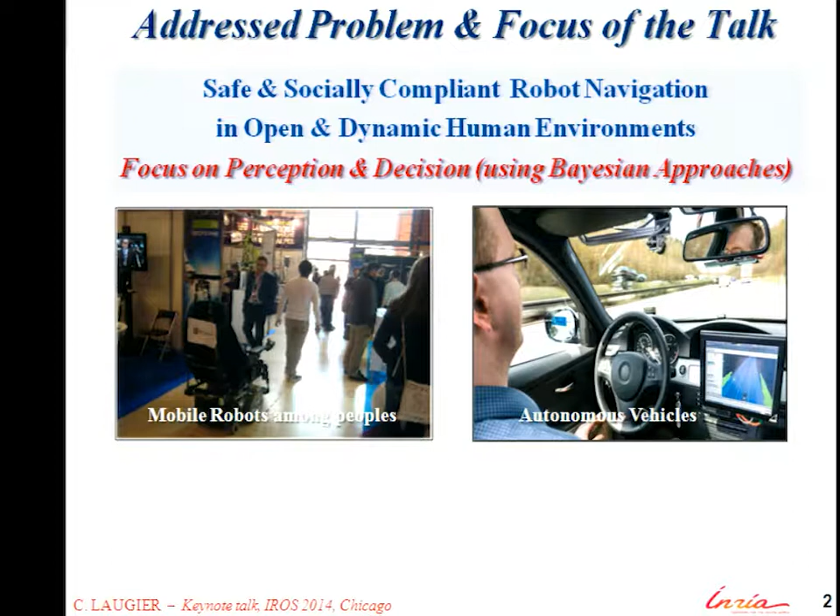The main features of this problem are, first, that the world is dynamic and open, so we have to take care of this when designing the models. The second point is linked to this: incompleteness, and managing uncertainty at both the model and perception levels. Finally, the human is in the loop, so we have to address social and interaction constraints when making decisions.

For the first point, perception: we need robust perception for dynamic human environments, processing different levels of perception. The first is the basic level for sensor fusion, SLAM, DATMO. The second takes into account contextual information and semantics for interpretation. The last level is close to the application.

For vehicles, the idea is to detect what is a safe navigable space at a given time. The main difficulty, again, is processing noisy data, incompleteness, dynamicity, discrete measurements from the system, and of course doing this in real time. All the models and algorithms have to take this important constraint into account.

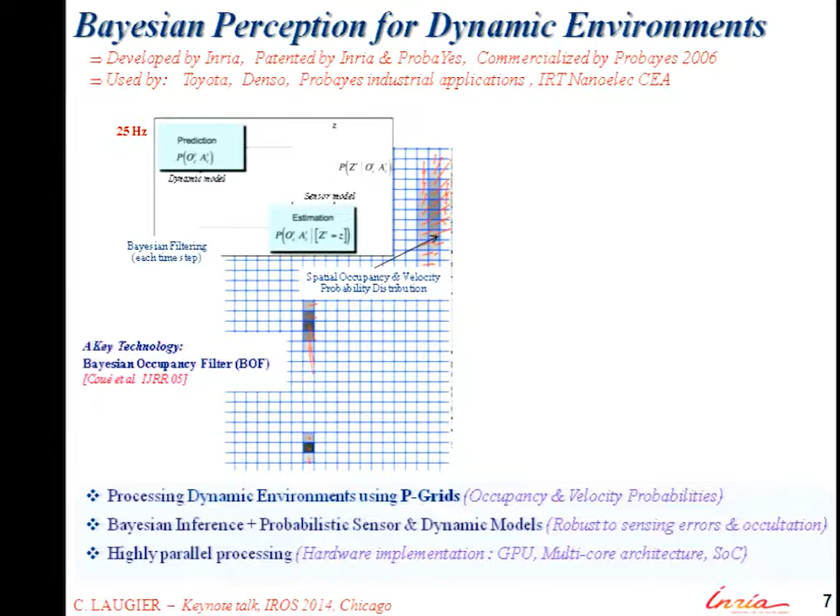One important property of this approach is the conservative prediction capability inside the inference system. This means it's possible to execute collision avoidance or collision anticipation using only this information.

For instance, here's an example of a pedestrian who is probably going to cross the street. This is an autonomous vehicle, and this is the vehicle which is parked. At one point the system detects and tracks the pedestrian. Then it will no longer see the pedestrian, but you'll see it stops, because it predicts that the pedestrian will probably continue to move. This is completely embedded in the process.

But we still have problems with the accuracy of velocity computation and the required memory size. So we recently improved this by making a hybrid system, separating what is static from what is dynamic. The static part is represented traditionally using an occupancy grid, and the dynamic part is represented using a set of particles, a kind of vector field of velocities. It's really more accurate.

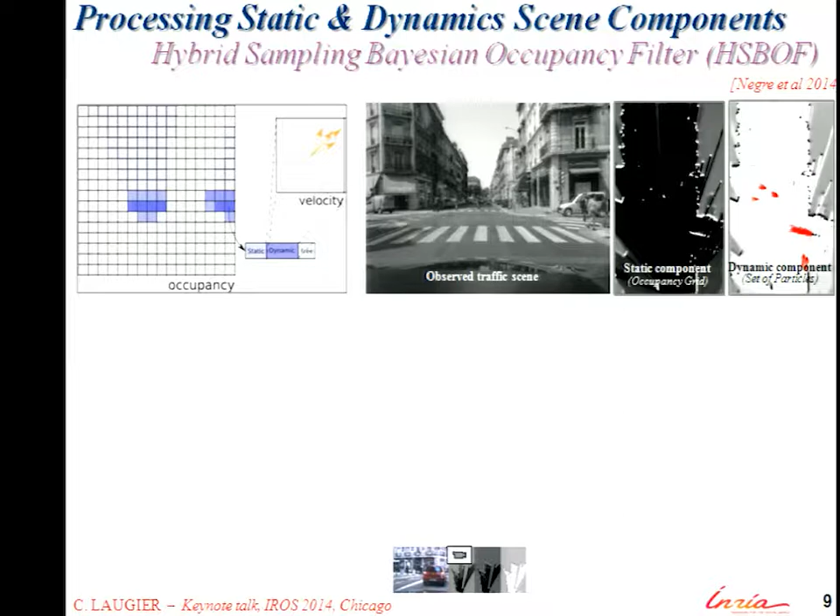Moreover, we can use information from the sensors inside the car to update the model. So in this case we have two parts: the static component, represented using an occupancy grid, and the dynamic component, represented by sets of particles, which allows smooth integration of the vehicle's motion for more realistic results.

Then all the information is propagated into the grid, and the set of particles move through the grid according to the dynamic model included in these particles.

So this is an example. I'll stop here. No, it doesn't work.

Okay, so this is an example in downtown Grenoble. Our car is here, and this is another car. There are a lot of pedestrians in the downtown area, and we are moving through the city. What you can see here is the result of scanning using the laser, the construction of the occupancy grid, and the real-time tracking and detection of what is moving and at what velocity.

So this, for instance, is a car. Each pedestrian is easily recognized and detected using the approach. I'll come back to this later for the detection of risk.

This has been implemented on this car, a Lexus, in cooperation with Toyota. At the moment we have two laser scanners and a stereo camera, and also another camera here.

This is the implementation inside the car, and what we are currently doing is miniaturizing the system by implementing it on a new NVIDIA GPU, but also an implementation on a many-core STHORM architecture, in order to reduce the size and energy consumption of the system and improve its efficiency.

So basically, this is the thing we are obtaining using directly the information processed by the system. I mean recorded trajectory using OpenStreetMap, GPS, IMU, and so on. This is a result of sensor fusion, and this is a result of the analysis of the situation, which gives at each time step what is the navigable space just in front of the vehicle.

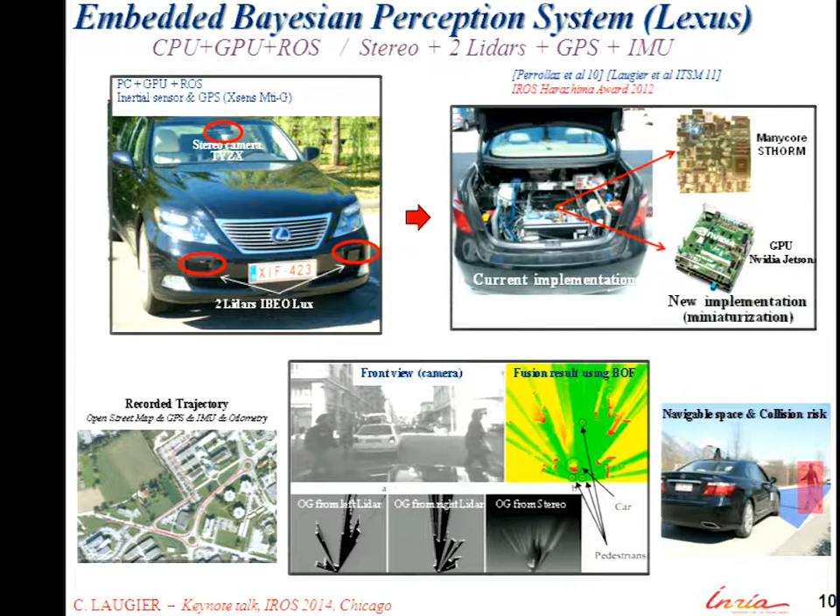So this architecture is then combined with a model in order to construct objects, to detect objects, and to track objects, and to understand what objects are doing. Objects can be bicycles, pedestrians, cars, and so on.

And this is the result of the Bayesian sensor fusion, including stereo vision and laser scanners. The result isn't really visible for anybody here, but basically the result is the fusion of this information into this model, combining occupancy probability and velocity probabilities.

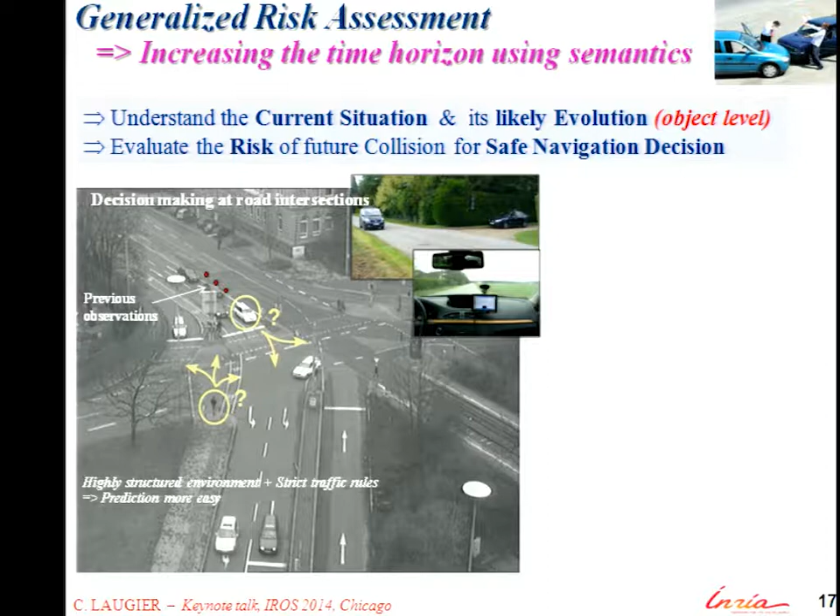So this can be used for evaluating the risk of collision and for making safe navigation decisions. I will skip the details since time is over. Just a video showing how the system is working on the road.

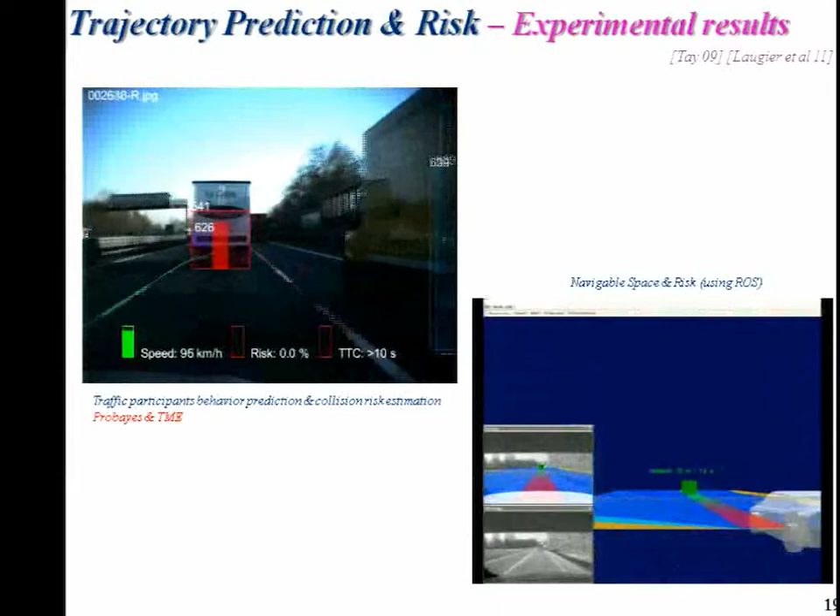This is the speed of the vehicle, about 100 kilometers per hour, the risk, and the time to collision. On the different tracks, we can see the prediction of whether the truck is going to move straight, turn left, or change to the right lane. And this is the representation of the risk for the driver of the vehicle.

A last video shows how the system works when there are several participants at an intersection, where we need a different way to reason. In this case, we use a human-like reasoning process, comparing the driver's intention and the driver's expectation. Comparing both, we can detect a possible risk. This is a video showing how the system is working, and it's valid.

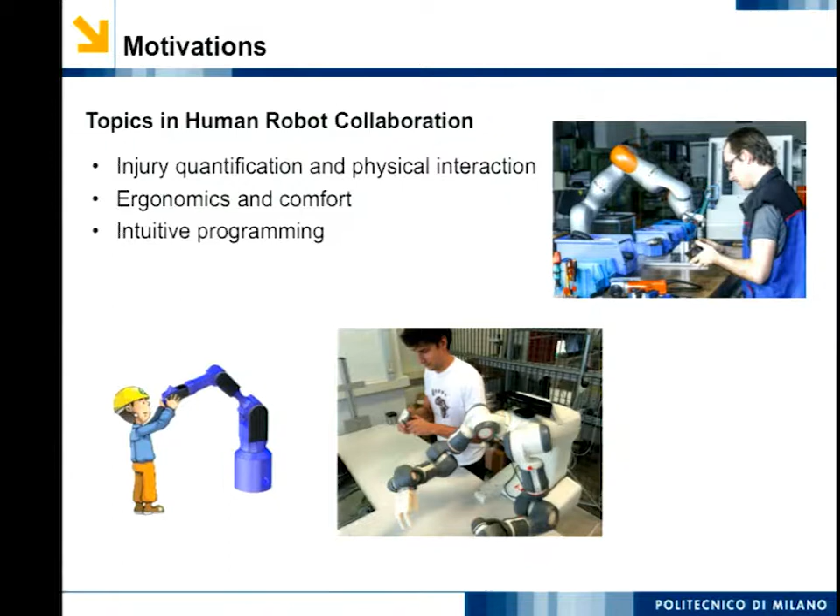My name is Andrea Zanchettin. I'm going to present this work, titled Real-Time Collision Avoidance in Human-Robot Interaction based on Kinetostatic Safety Field, developed in my lab in collaboration with Matteo Parigi, a former master student, and Professor Paolo Rocco. We have been working on human-robot collaboration in our lab for quite a few years, addressing different topics: injury quantification for physical interaction, ergonomics and comfort during human-robot interaction, intuitive programming, and of course collision avoidance, which is the main topic of my presentation.

There are many alternatives to cope with collision avoidance. One is randomized planning, based for example on RRTs. Another is artificial potential fields, and probably many others. But sometimes they are difficult to adopt in real time, or they are poorly capable of capturing the geometry of both the obstacle and the robot.

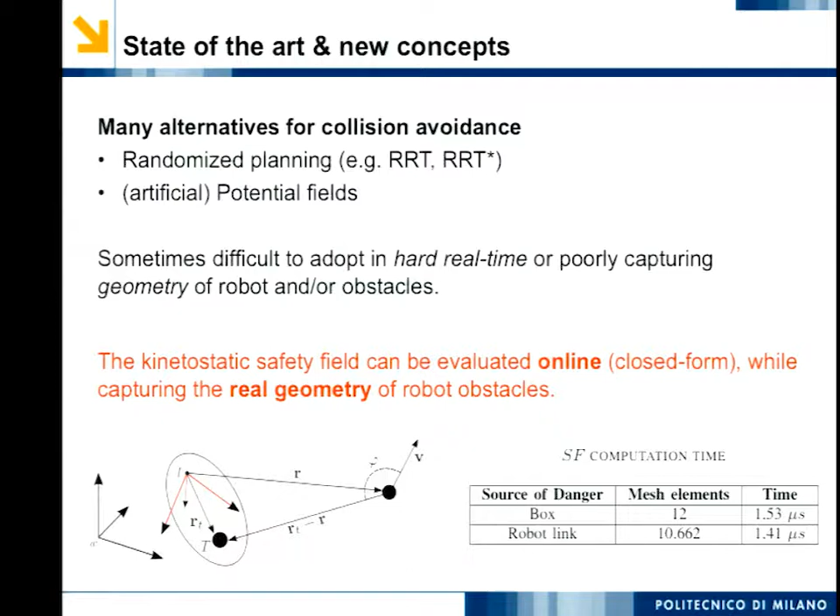So we developed the so-called kinetostatic safety field, which is very convenient to use in real time, with a closed form solution so we can compute it quite fast - something like 1 microsecond - and it is very capable of capturing the whole geometry of the robot and of the obstacles. We use this with a control strategy, where the field helps avoid obstacles based on null space projection. Eventually, when the risk of collision is too high, we can relax the task in order to fully exploit all available degrees of freedom.

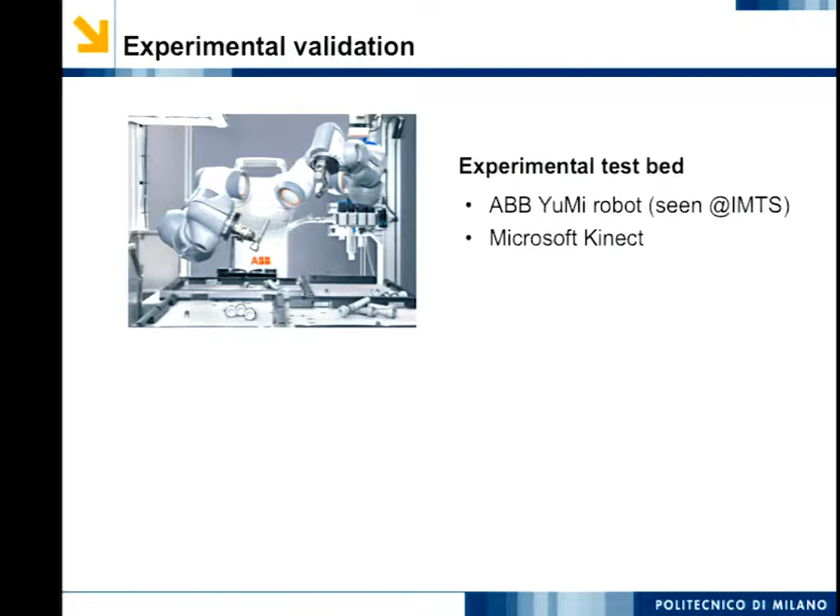So we did some experimental validation based on a dual-arm ABB YuMi robot, which you probably have seen at the IMTS fair. We used the Microsoft Kinect and the Reflexxes motion library for trajectory generation.

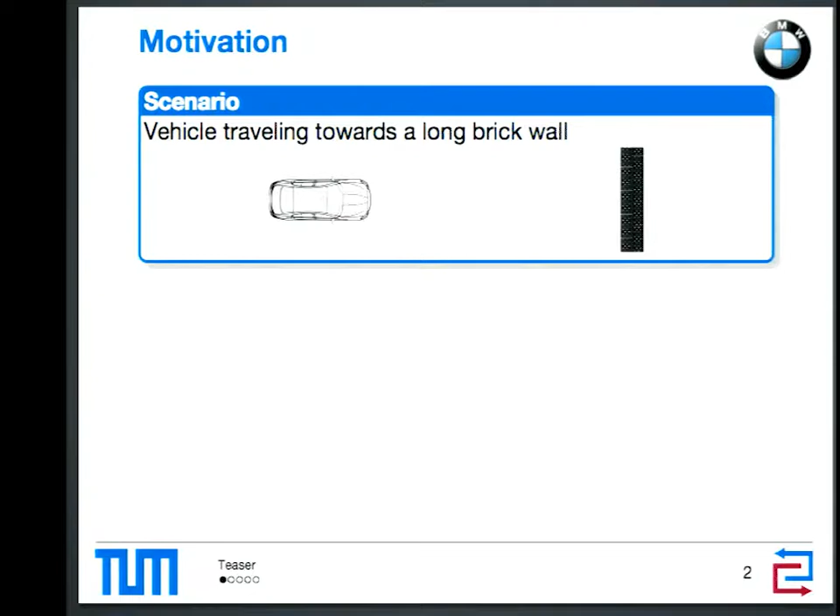Think about an autonomous platform which is driving towards a wall. The most intuitive approach to guarantee safety here is to use your trajectory generator and check all your trajectories for a collision, then execute one which seems to be collision free. However, this might lead to situations where at a later time step, all your actions will end up in a collision.

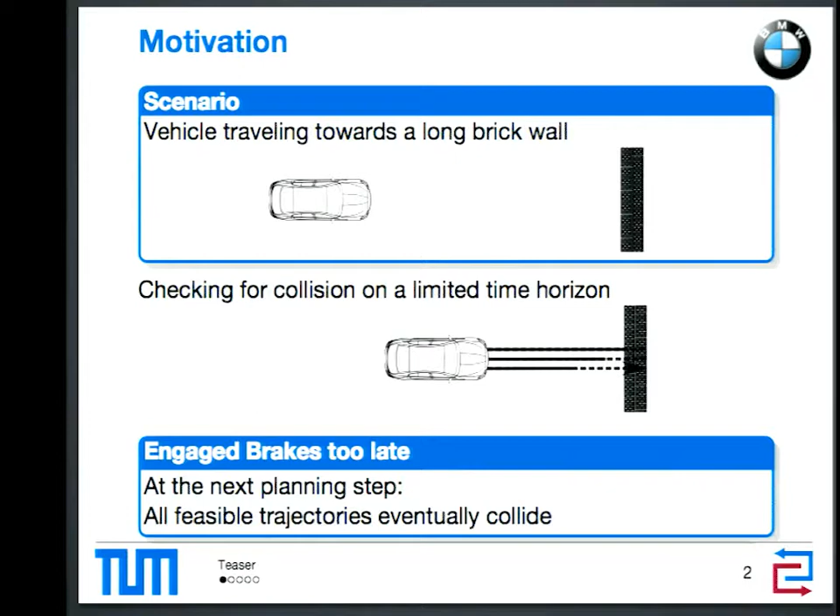These are called inevitable collision states. So you engaged your brakes just too late. Of course, we need to determine and avoid such states beforehand, which is pretty straightforward for one-dimensional systems with static obstacles, but becomes really challenging for higher dimensional systems and dynamic obstacles.

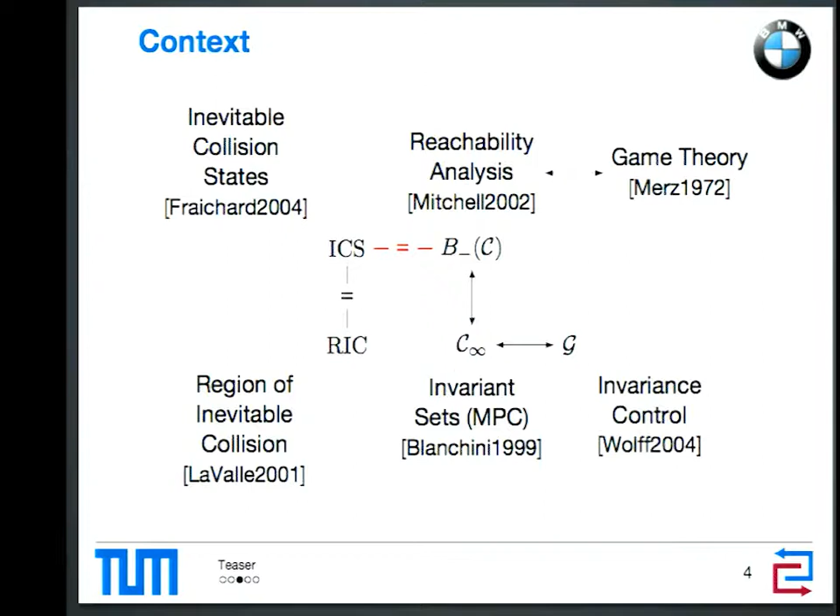There are different approaches to solve this problem, and what we're doing in this work is fusing the approach of inevitable collision states on one hand and reachability analysis on the other hand. With this, we are able to determine all the states which will inevitably lead to a collision, and we can avoid them later on.

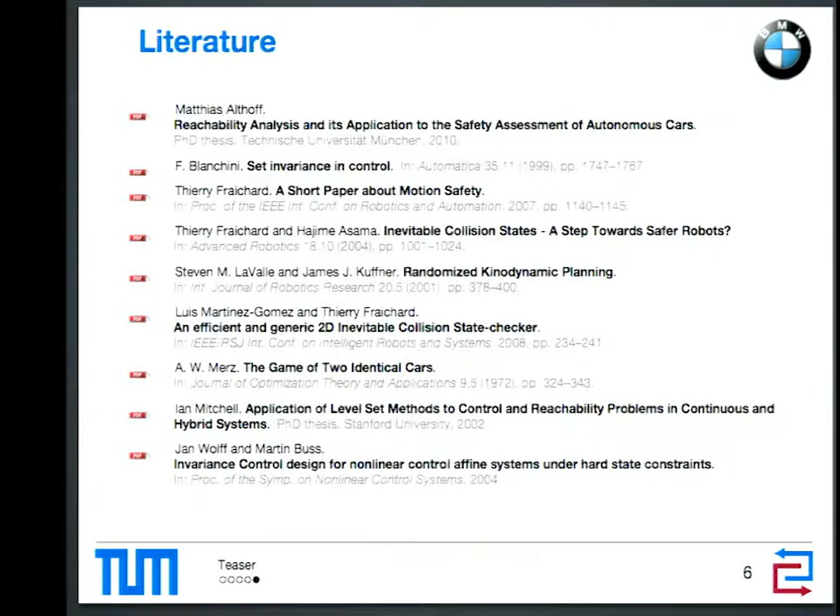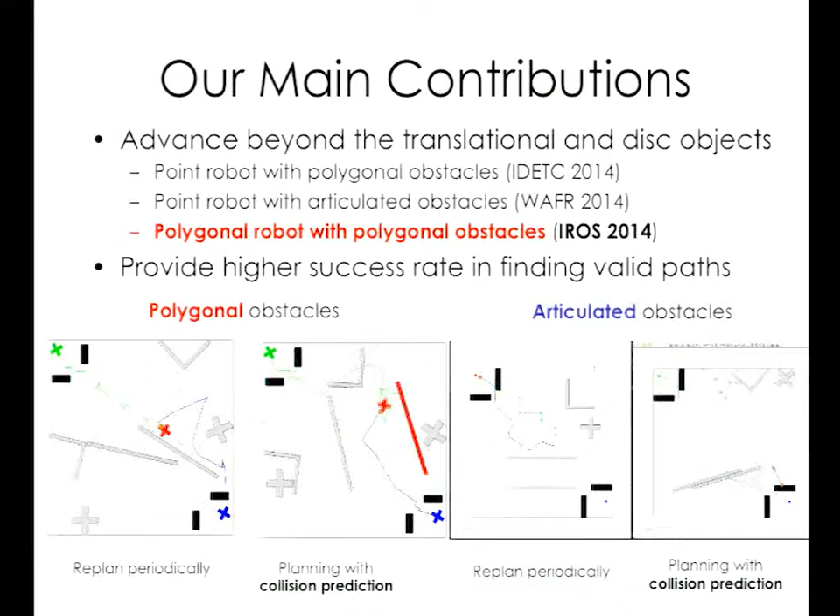The key idea is to compute the earliest collision time for a robot moving on a path. Contrary to traditional motion planning, we not only plan a path for the robot to execute, but also plan motions for the obstacles. We model obstacles as adversarial agents trying to minimize the time for the robot to remain safe on the path. So given time t, we know where the robot is, and the motion of an obstacle is calculated to minimize the time to hit the robot, which can be modeled as a function of t.

So the key theorem behind it is that the curve t equals t and f of t can partition the space into several regions, and we are interested in the potential collision region. The leftmost point of that region will be the earliest collision time.

For the polygonal case, we can decompose f of t into translational and rotational components, and by solving an optimization problem, we can get the earliest collision time.

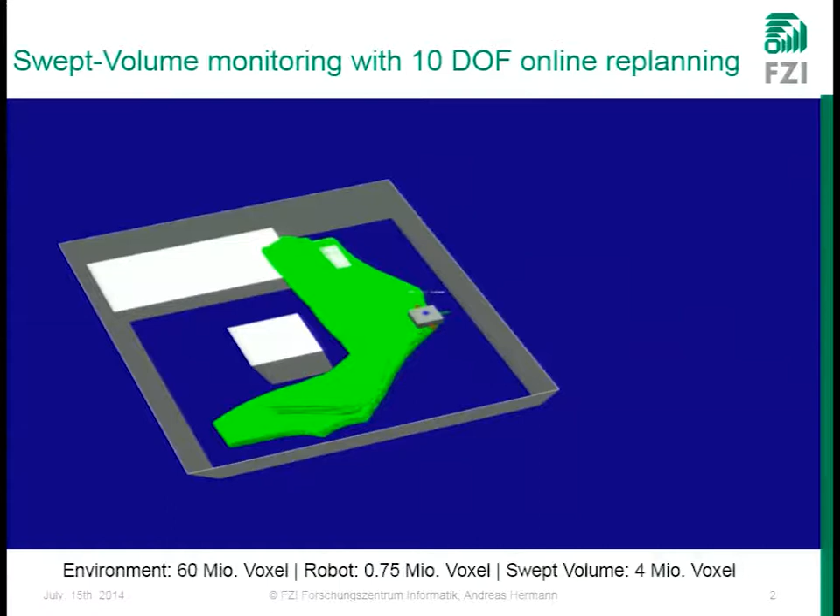In this video, you see a typical situation for a mobile service robot. You have a dynamic environment, and the robot has to go from the left corner to the right corner. What you see here is its motion plan represented as a swept volume, a safe corridor for the robot. As long as the robot moves inside this corridor, there's no collision. If a dynamic obstacle intrudes this swept volume, the robot will stop and trigger a replanning.

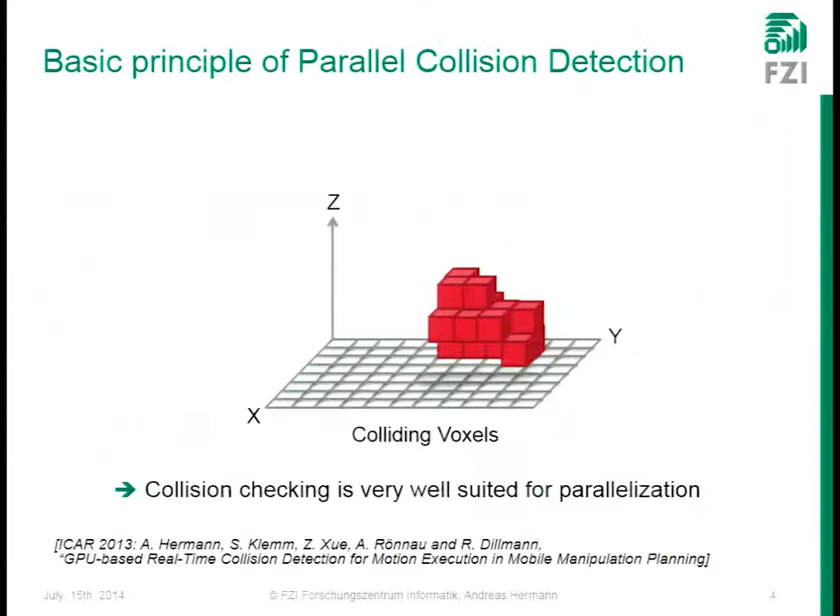We are using a voxel representation for the robot as well as for the environment. You have two maps, one environment, one robot, and you can intersect these two maps, do a pairwise collision detection on the GPU, and get the resulting set of colliding voxels. This is very well suited for parallel calculations on the GPU, but the problem is you have a dynamic environment, and therefore you need a dynamic size data structure on the GPU, which contradicts somehow the programming paradigms of a GPU. So we had to come up with a solution.

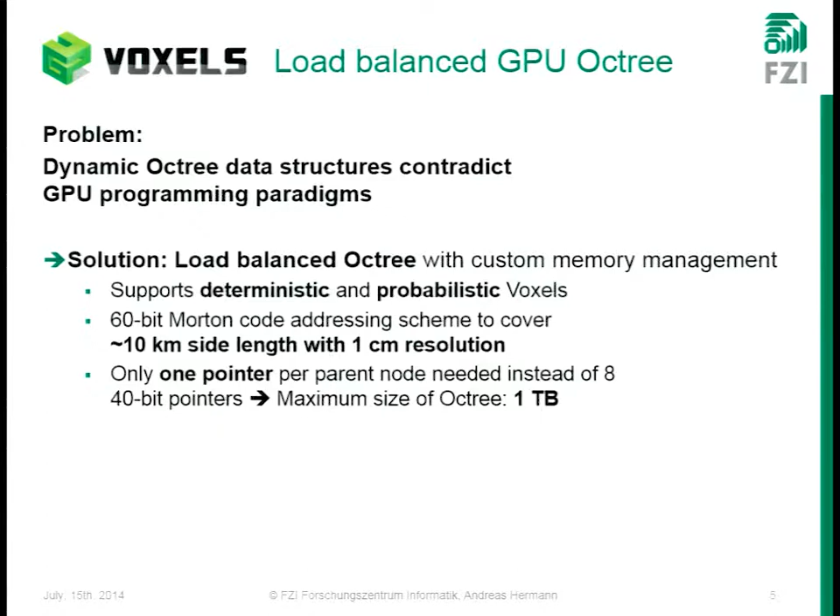This is our load-balanced octree, which has a custom memory management and some other impressive technical details that enable the speed at which you can build up this octree on a GPU.

You can insert up to 10 million voxels within 100 milliseconds into this octree, and this already includes the free space calculations on the GPU. This enables us to use real-time map updates with multiple point cloud sensors like the Kinect.

We also implemented very efficient collision checks that are able to check up to 100 million voxels in only 20 milliseconds, and this enables us to do online replanning and real-time execution monitoring. Last but not least, one nice thing with the voxel representation is that you can check whole swept volumes of trajectories in the same time you would need to check only single poses of the robot.

The robot comes up with a plan just straight through these obstacles, and now I'm placing a new obstacle there. The robot detects this and does an online replanning without stopping the robot. So it's very fast and very capable.

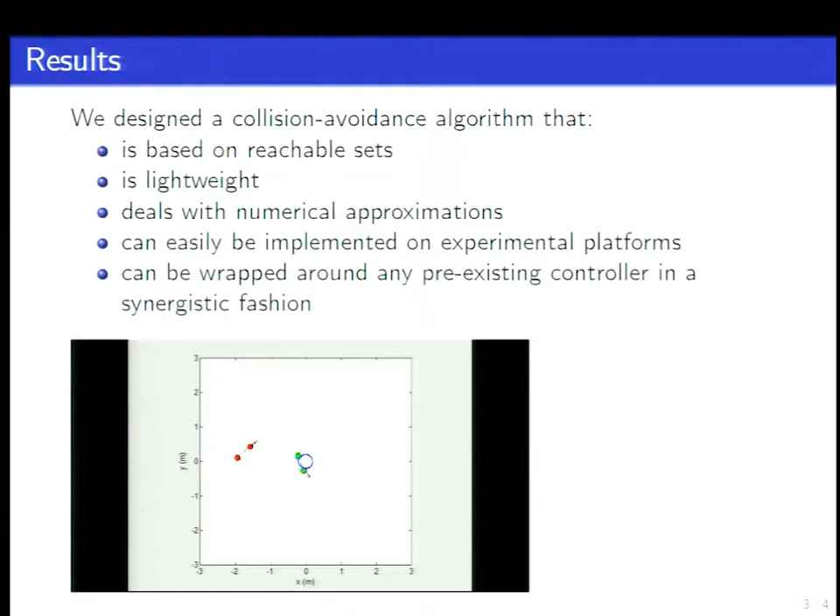Hello everybody. This is my topic: time scaled collision cone-based trajectory optimization for reactive planning in dynamic environments. I'm Bharat Gopalakrishnan from IIIT Hyderabad, India.

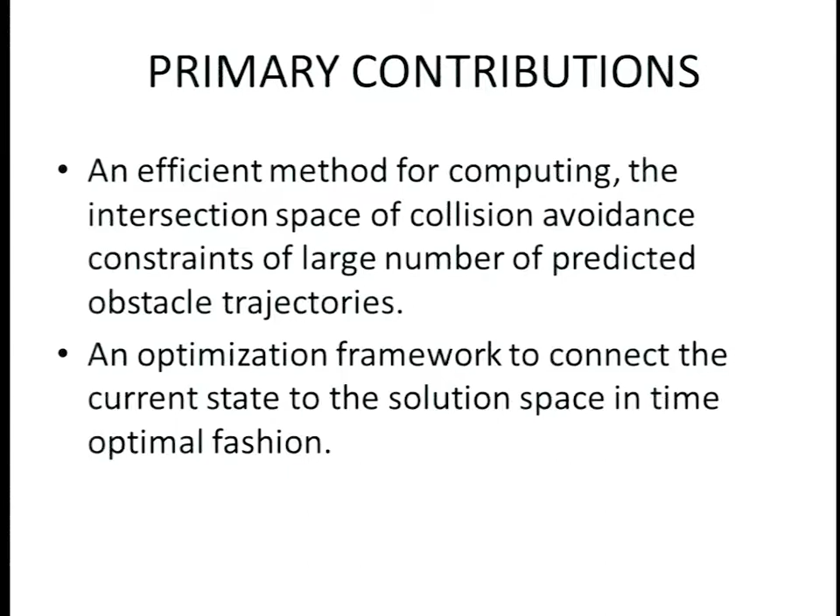The primary contributions of our paper are: we have an efficient method for computing intersection solution spaces for a large number of predicted dynamic obstacles. And then after we do that, we have an optimization framework to connect our current state to the solution space in a time optimal fashion.

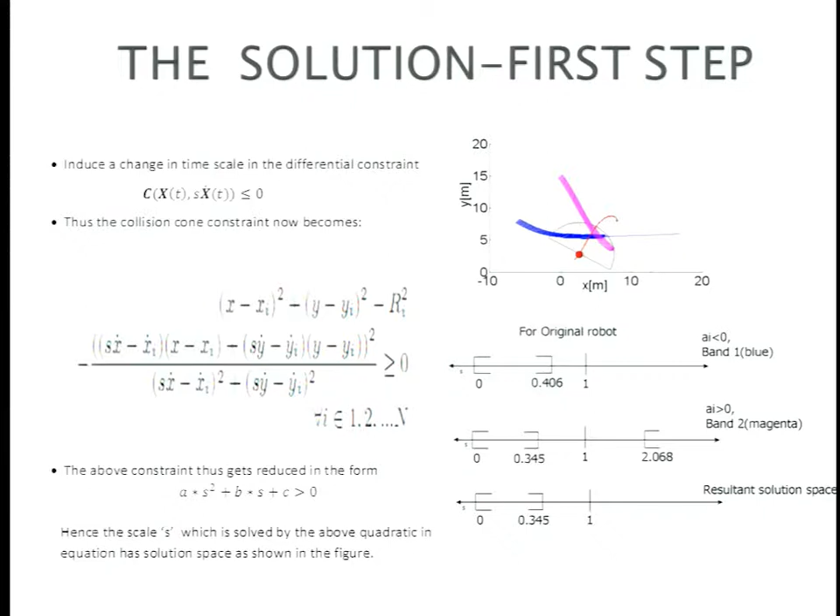Good morning, my name is Janno Lunenburg of the Eindhoven University of Technology, and I'm here to explain the work we've done on robot navigation in domestic environments. This is our robot Amigo driving through an Octomap representation of a scaled version of the 2013 RoboCup at-home environment.

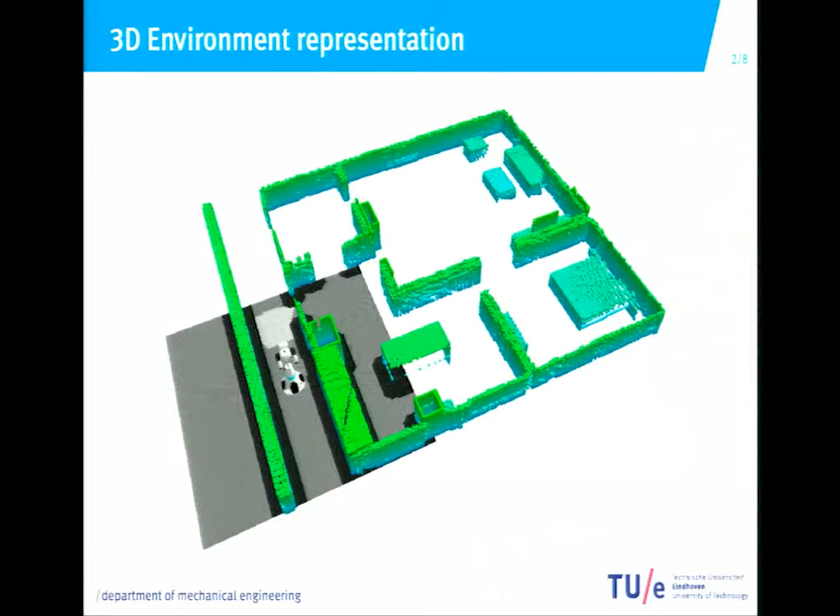Now, we can do a down projection of all occupied cells, inflate that with a robot radius so that we know where the robot can and cannot go. I guess everybody knows this doesn't work in practice. There is uncertainty about the robot position, there is sensing uncertainty, and there are obstacles moving through the environment. So usually this cost map is inflated with some exponential function to take those uncertainties into account.

However, this still does not lead to the desired behavior. If we inflate our cost map too much, the behavior becomes too conservative and the robot does not want to drive through narrow passages. On the other hand, if you don't inflate enough, behavior might become dangerous. Therefore, we have to try and model all uncertainties in our representation explicitly.

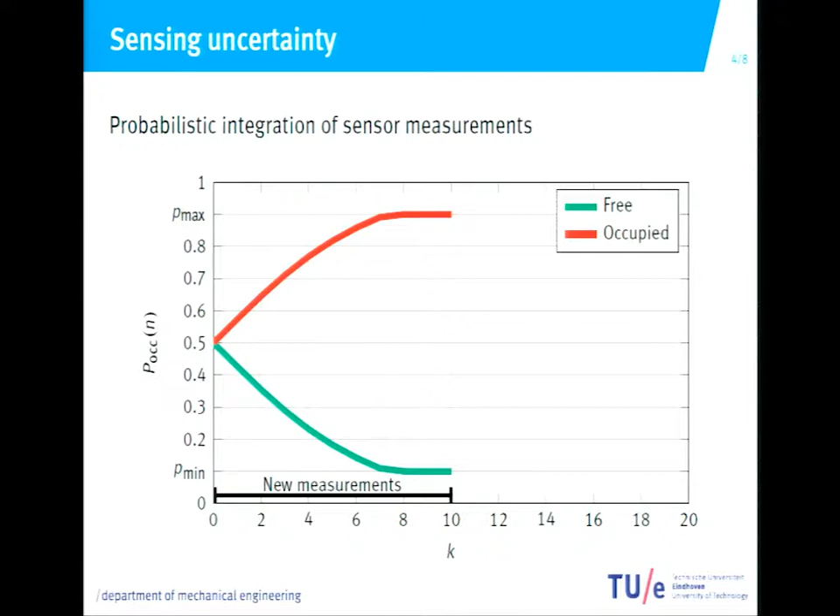Sensing uncertainty is the first thing. This is already addressed in the probabilistic integration of sensor measurements of the usual OctoMap framework. Usually, when no new measurements are received, the probability of cells being occupied remains the same. However, the environment might change in this time. Therefore, we added a time-dependent occupancy probability model.

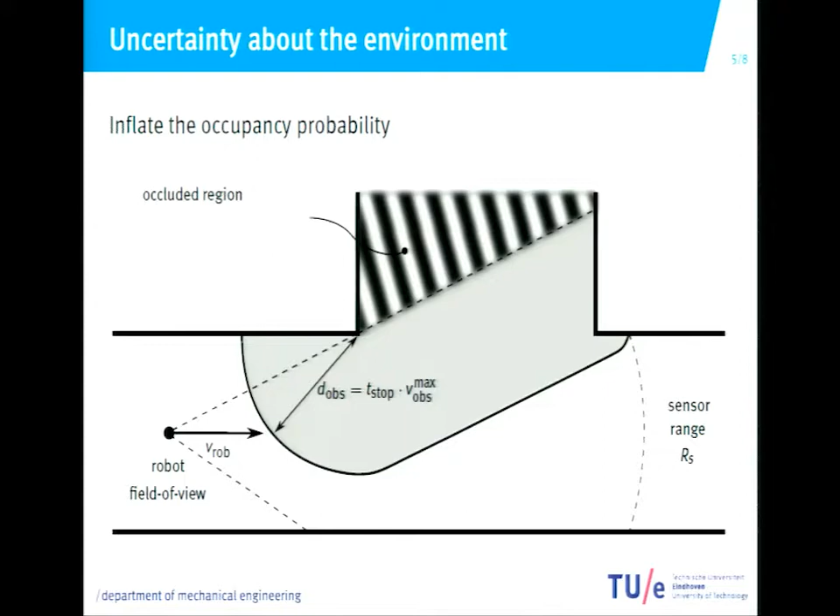Furthermore, to account for moving obstacles that might come out of occluded parts of the environment, we inflate our probability cost map to make sure the robot doesn't bump into these obstacles. Finally, we model the robot position uncertainty using a bivariate normal distribution. By combining the probabilities of a cell being occupied by both an obstacle and the robot, we can compute a safe velocity limit for the robot.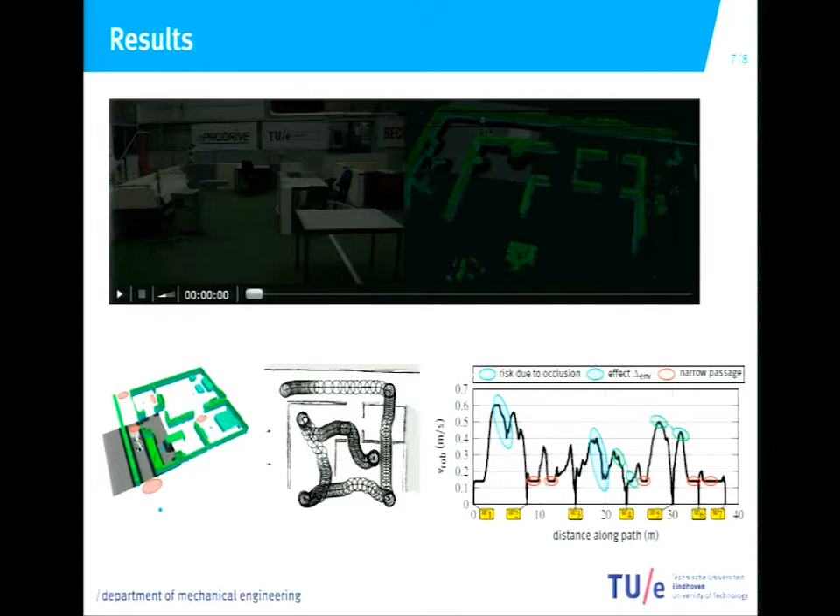Hello to everybody. My name is Arne-Christoph Hildebrandt and I work, like my colleagues, at the Institute of Applied Mechanics at the Technical University of Munich. And I will present you today our work of the last year.

It's named Real-Time 3D Collision Avoidance for Biped Robots. Our main motivation was to let our robot walk in unknown environments, detect obstacles, avoid them, while using the ability for biped robots to step over them.

So at first, let me give you a short introduction to our general control scheme. It's a hierarchical-based scheme. We have, first of all, the step sequence plan and the walking pattern generation, which generate trajectories in task space. Then the reactive control, it's a stabilization unit, which is executed during the stepping of the robot. Now we added first obstacles to our self-collision avoidance method, which was presented in previous work. But this work here is not really focused on this obstacle representation.

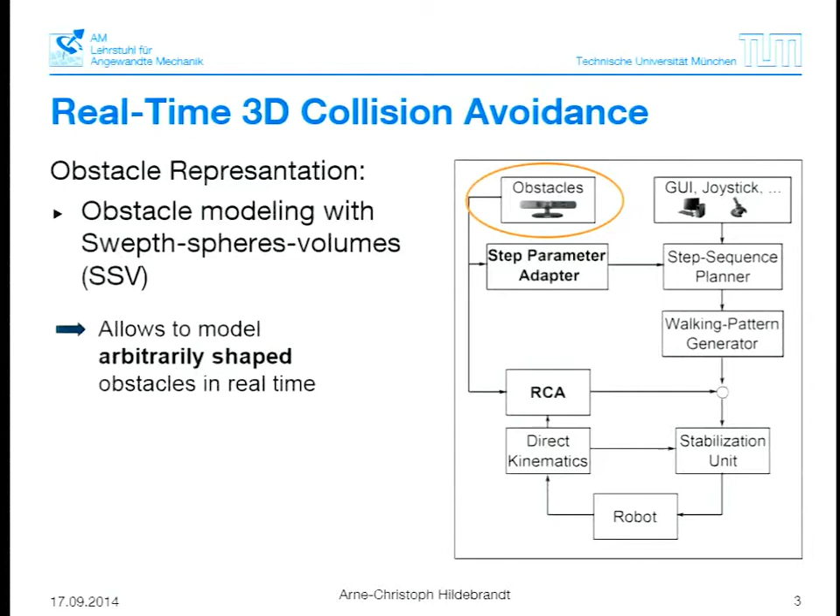Our method consists, first of all, of the step parameter adapter, which calculates valid foot step positions, so we don't want the robot to step on an obstacle. The second part also calculates an initial solution for the swing foot trajectories using all degrees of freedom of the foot. Then it's the part of the reactive control, which modifies during the execution of the swing foot movement the degrees of freedom of the swing foot to avoid the obstacles using a local potential field approach.

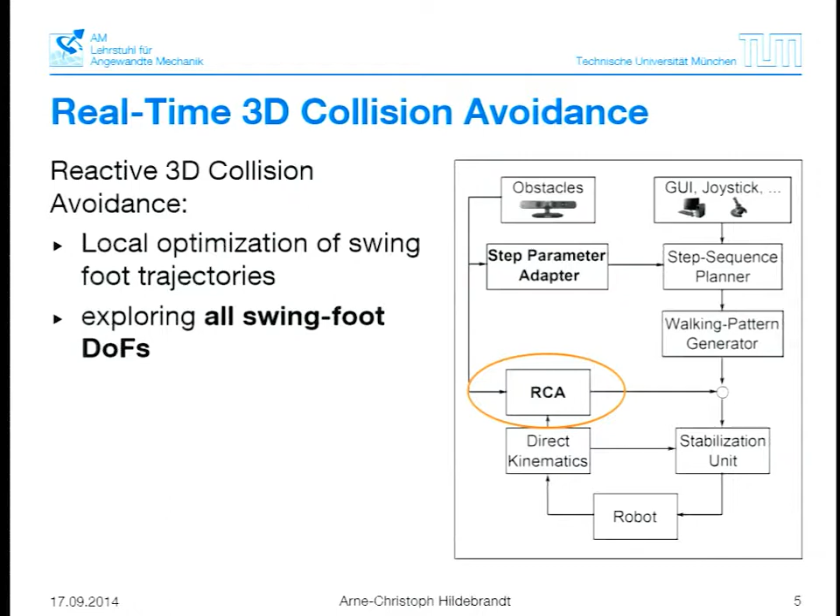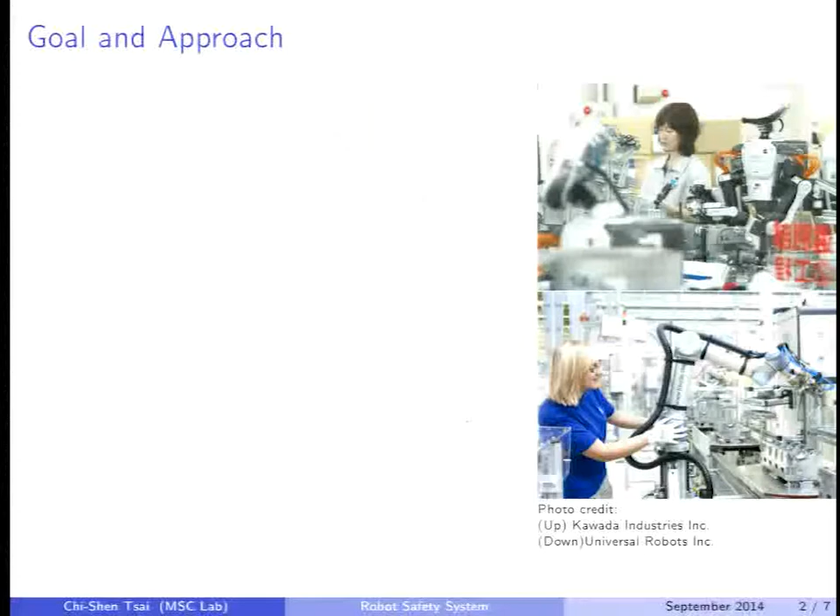Hi everyone, my name is Chi-Shen Tsai. The title of my work is Ensuring Safety of Human-Robot Coexistent Environment. The motivation of our work is very simple: we want to put a human worker and a robot together to cooperate with each other, and also avoid the robot hitting the human workers. So the contribution of our work is we design a measure for the safety of the human workers, and also we developed an algorithm to generate trajectories for the robot to avoid collisions and also accomplish its task.

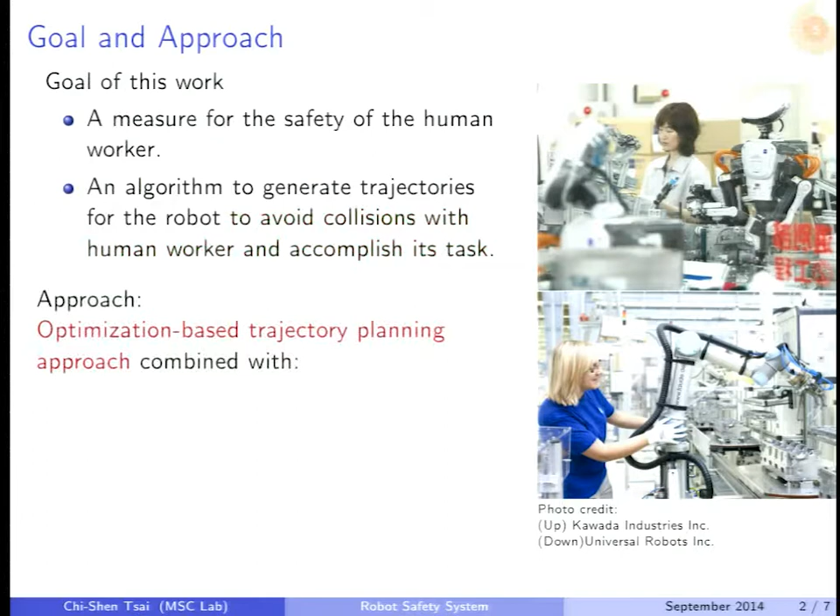In this work, we use optimization-based trajectory planning. We also combine the ellipsoid coordinate and ellipsoid representation with the safety index, discrete kinematic model, and the receding horizon strategy. Later, we approximate this formulation into a quadratic form so we can compute it in real time and very fast. For the ellipsoid representation, for each of the human worker and the robot, we use a set of ellipsoids to represent it.

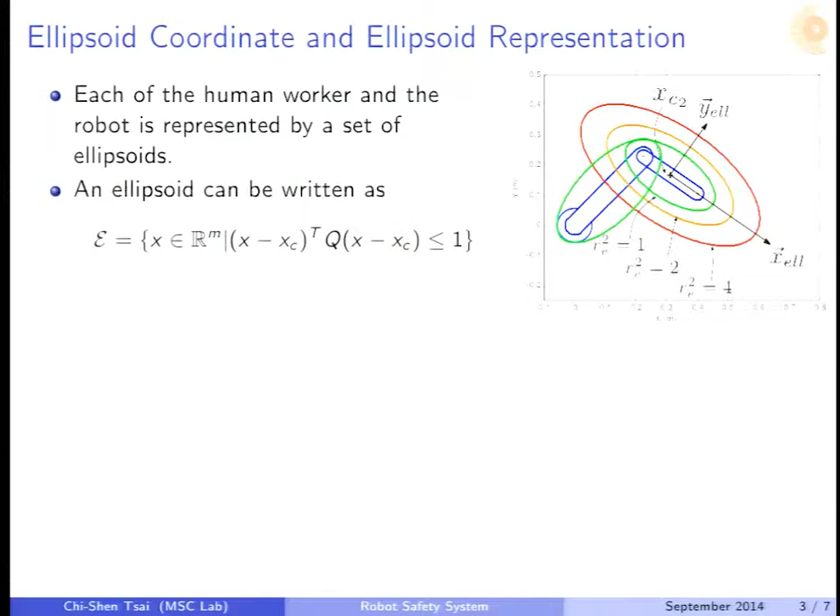This is an example of the human worker and the 7 degree of freedom robot. In the 2D case, it looks like this. And for the ellipsoid of the robot, we further define an ellipsoid coordinate. So for every point in the task space, from this point to the ellipsoid center, we can compute the ellipsoid coordinate.

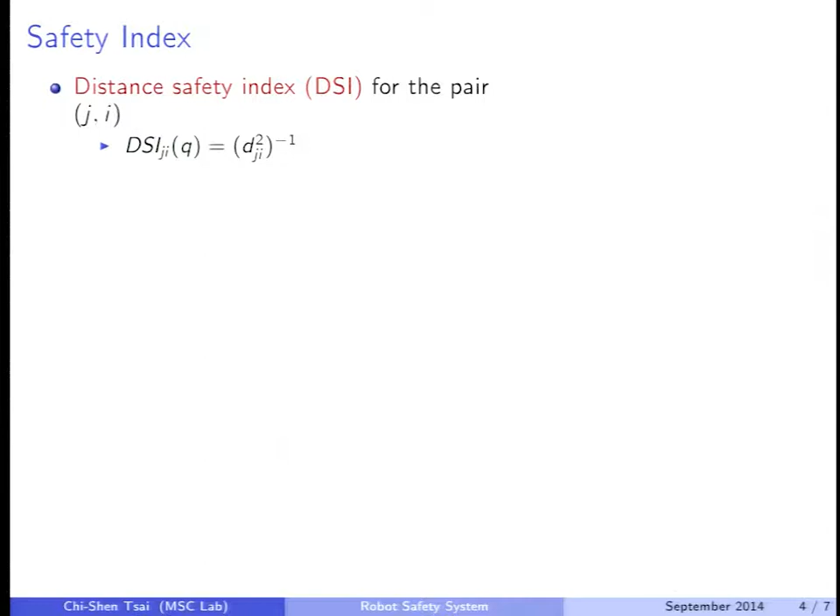We can compute this shortest distance in this ellipsoid coordinate, and it looks like this. So we can compute the ellipsoid coordinate to the ellipsoid center. Based on this shortest distance in the ellipsoid coordinate, we define a distance safety index. We also use the linear momentum from the robot link to human to define a momentum safety index. And later, we combine these two together.

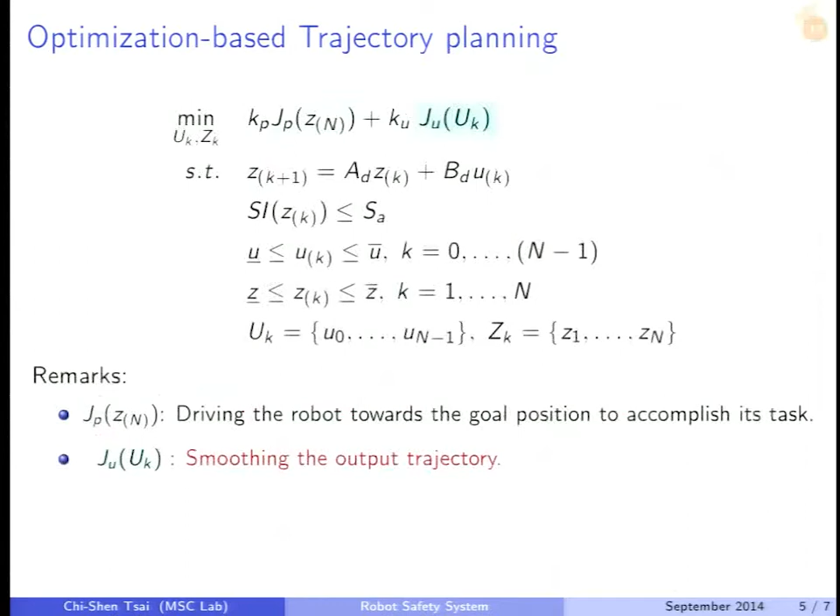For the formulation of the optimization, we consider two terms in the objective function. One is to drive the robot toward a goal position, and the second is to smooth the trajectory. As I said, we use a discretized kinematic model to make sure it's the trajectory, not the path. And then we put a safety index in as a hard constraint to make sure the safety of the human workers.

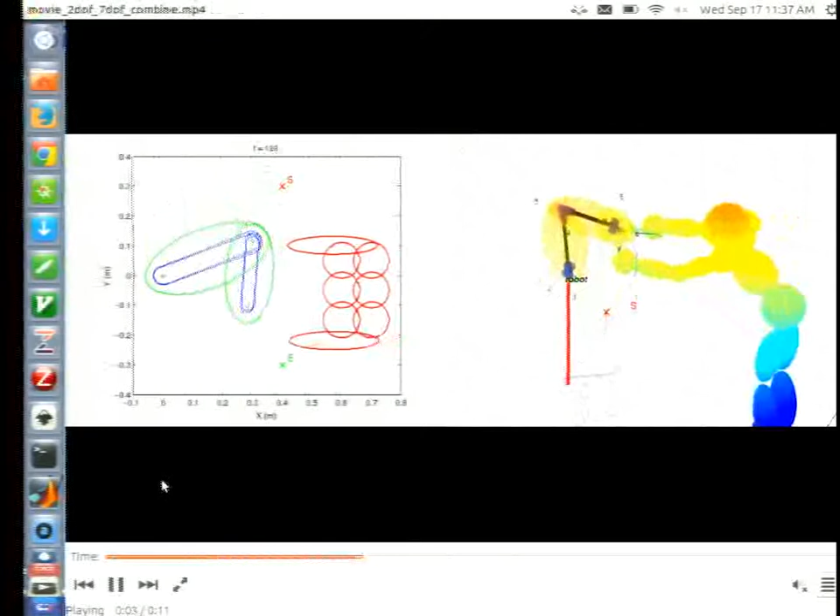So this is a simulation result. We simulate in 2 degrees of freedom and 7 degrees of freedom. The robot is always on the left-hand side. As you can see, the robot can avoid the human in real time. Actually, it's not real time for the 7 degrees of freedom, but it's still very fast.

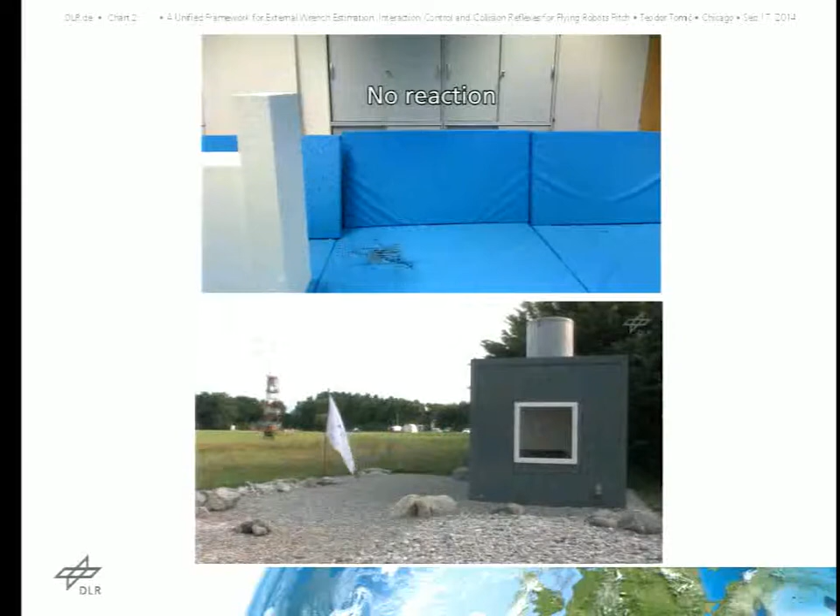For the motivation: autonomous flight in unknown cluttered environments requires exteroceptive sensors for collision avoidance, which may fail or be inaccurate. For example, due to sensor resolution if the obstacle is too small, or due to environment reflectance properties, such as a camera not seeing a window, or a laser scanner also seeing through a window. Therefore, flying in unknown environments may lead to unforeseen collisions, which may cause serious damage to the robot, as you can see from these videos. So in this context, fast and robust collision detection combined with safe reaction is essential.

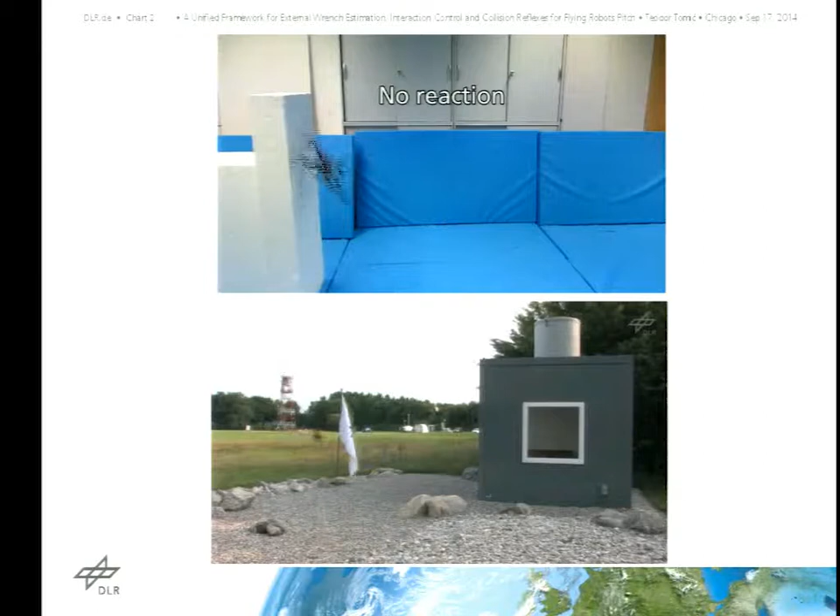This may be achieved using external wrench estimation. In our paper, we use the control input, system model, and proprioceptive sensors to estimate the external wrench using a momentum and acceleration-based method. We use this wrench for interaction control because a collision is a physical interaction with the environment. We also investigate collision reflexes: detection of the collision, classification, isolation (the collision position), and safe reaction.

The external wrench estimator requires only the IMU, and we estimate the external force using the accelerometer, so we don't need a translational velocity estimate. We use the external torque using the angular velocity measurement.

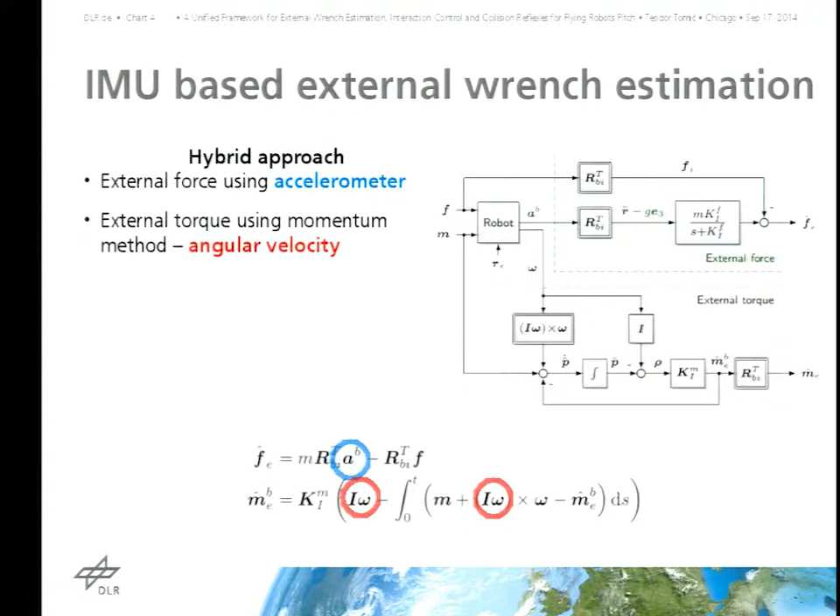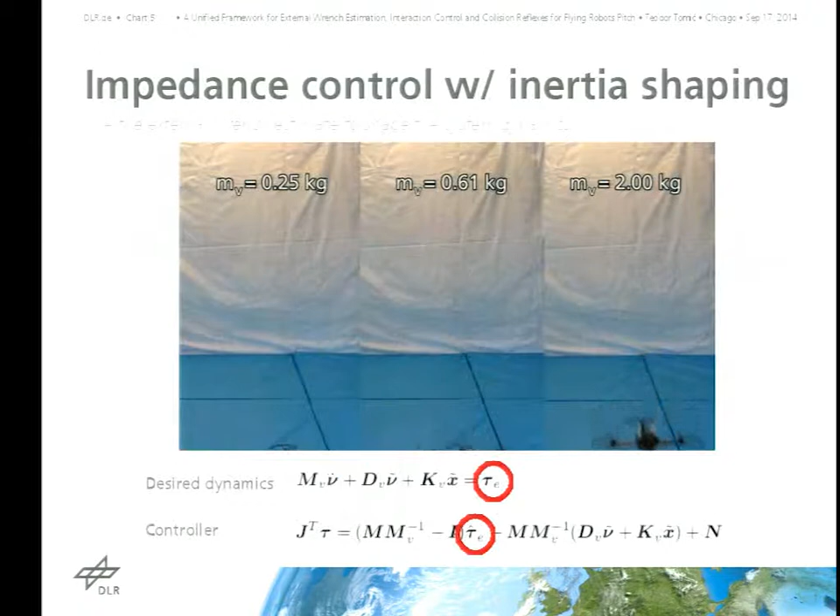This can be used for impedance control. Our formulation allows inertia shaping, and we feed back the external wrench estimate. Here you can see the response for the same quadcopter with different virtual masses when the same load is applied. So we can shape the inertia of the system.

For the collision detection signal, we use a threshold on the high-pass filtered external wrench estimate. Using the wrench information, we can also determine the collision position on the UAV's convex hull.

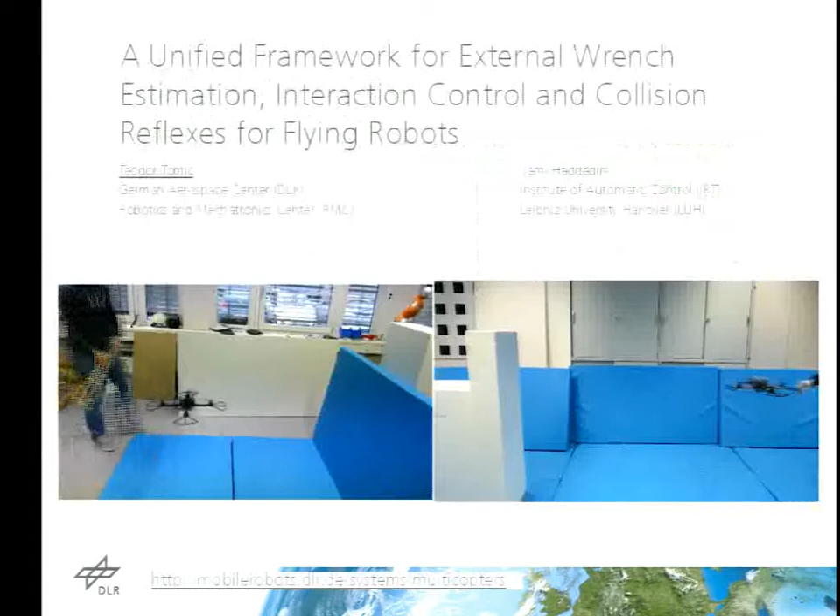We investigated several collision reflexes, and we showed that the method is very sensitive. If we react to the collision, the robot returns to a safe state and can be returned to a higher level planner. So to conclude, this method provides a safe collision reflex between collision avoidance and control. Thank you.

Hello. You all know the Microsoft Kinect sensor. It's cheap and provides depth maps at 30 frames per second. However, it's an active sensor, and as any other active sensing technology, this could cause interference. My name is Roberto, and today I'm going to present the results of our analysis of the measurement degradation due to the interference of multiple Kinect sensors.

Imagine this scenario, and now imagine that each one of these robots would carry a Kinect sensor to perceive the world. Well, the good news is that they couldn't see the good guy, Will Smith, because all of them would be blind. In our analysis, we focus in great detail on the interference between two Kinects, and we observe that up to 90% of the measurements are invalid due to interference.

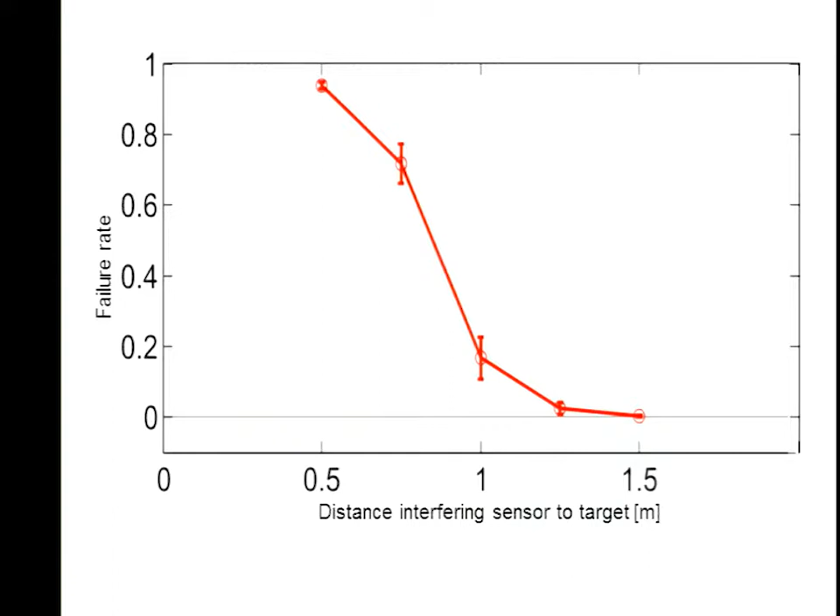If you want to see the complete results of our analysis, or you want to know more about our first analysis of the interference between multiple new Kinects, the Kinect 2, please come to my poster. Thank you.

Hello everybody, I am Pierre Mario from IRSEEM. My presentation today is about gangway automation for maintenance operation in offshore wind farms.

Today there are two solutions to access offshore wind farm turbines, but there are major safety problems. The first: we go with a small boat, but we have to come in contact directly with the wind turbine pile, and the operator has to jump directly onto the ladder. The second: a bigger boat equipped with a gangway, but this gangway has to be securely attached to the pile. As a result, it is difficult to release quickly in case of emergency.

So we propose to develop a compensated contactless gangway system.

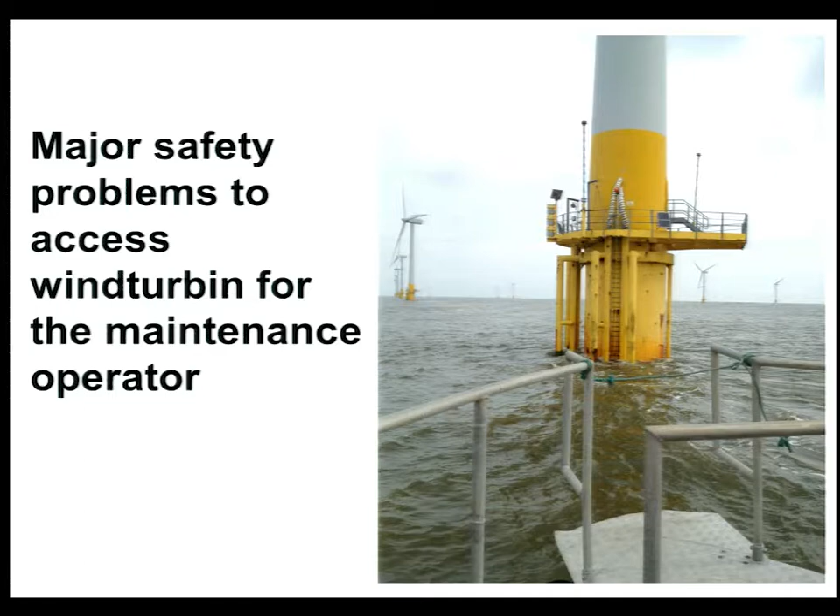The boat is equipped with a dynamic positioning system to maintain its position. But it's not able to compensate the 3 degrees of freedom: roll, pitch, and vertical movement called heave are not compensated. As a consequence, we need to control these 3 degrees of freedom and find a way to measure them.

We use two types of sensors. An inertial measurement unit measures roll, pitch, and heave with good precision, and we have evaluated them. We also use a LiDAR at the end of the gangway as a perception system to measure the 3 other degrees of freedom.

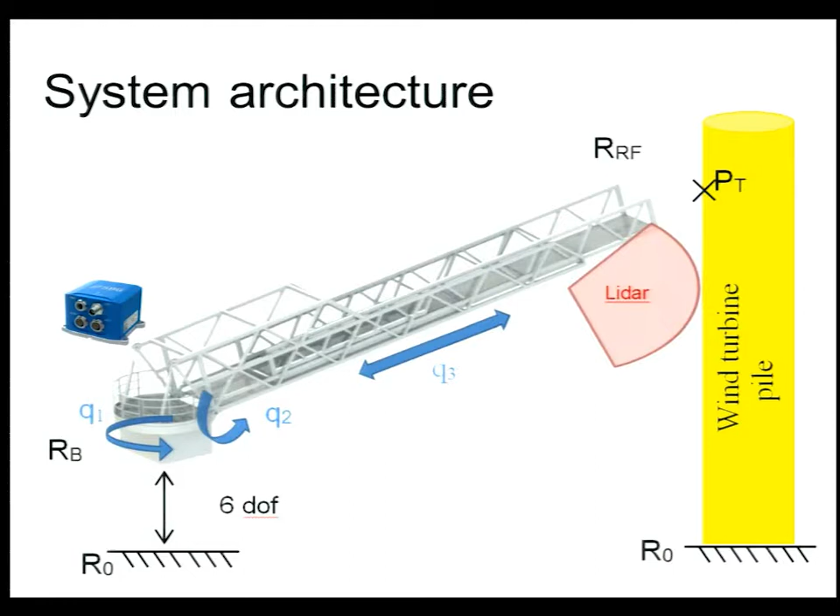This is a four-step algorithm to estimate the position of the pile. The first step is, with the IMU, we project the 3D points onto a horizontal plane. Then we use RANSAC to find the most likely circle. A circle fitting optimizes the best solution among all the points selected by RANSAC. The noise generated by the LiDAR and other artifacts are filtered out by a Kalman filter.

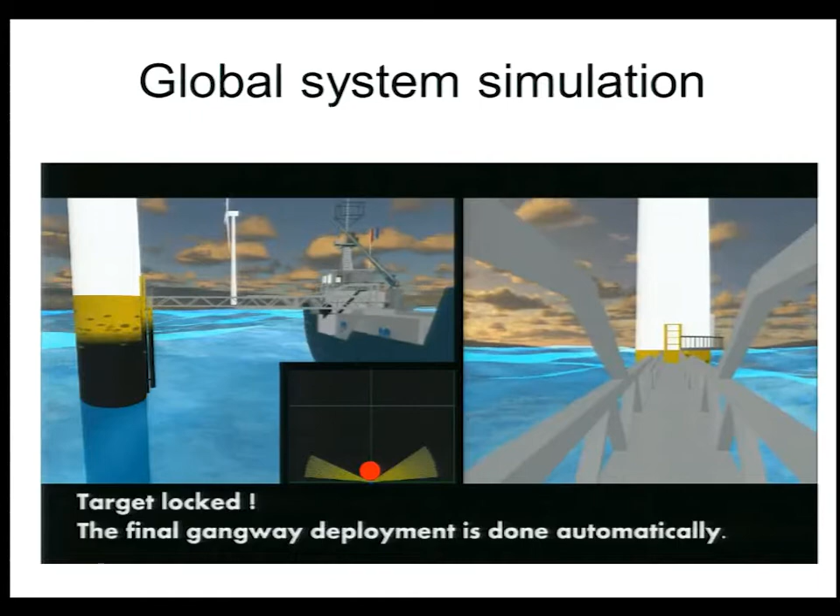On this short video, you can see the global simulation of the system using the pile detector. As you can notice, the end of the gangway is stationary in front of the wind turbine. But this is just a simulation, and to validate our algorithm in the laboratory under real-world conditions, we built a small-scale wind turbine pile and used a Kuka arm manipulator to reproduce the sea movement. If you want to see the results and have more information, please come see me at the interactive session.

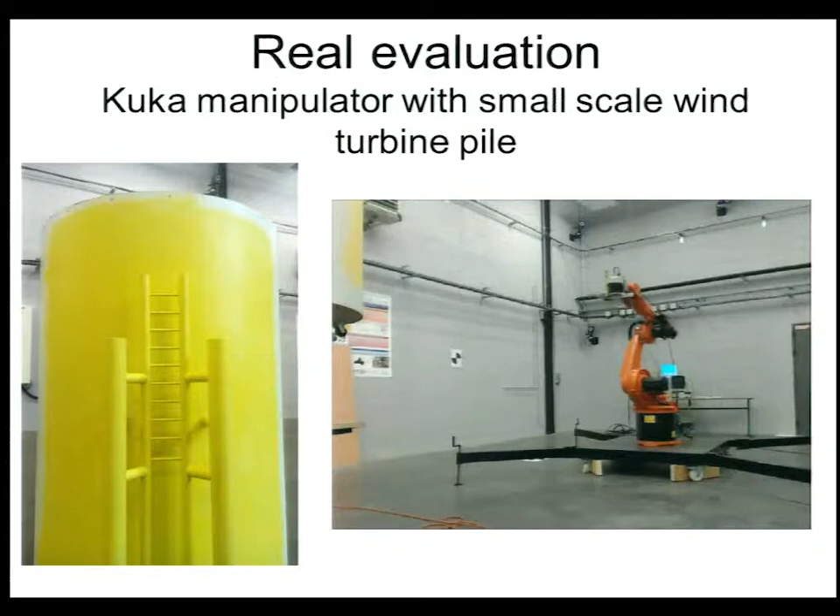Hi, my name is Chris Jordan, and today I'll talk to you about the work I've done with Philippos Mordohai about quantifying the different methods of estimating normals in a point cloud.

Point clouds are becoming more prevalent today, and they're very useful in computing things such as shape descriptors, which are in turn useful in object recognition, terrain classification, and obstacle avoidance. These have to be done fast and accurately. So far, to our knowledge, there has been no quantitative study done with a ground truth on the different methods.

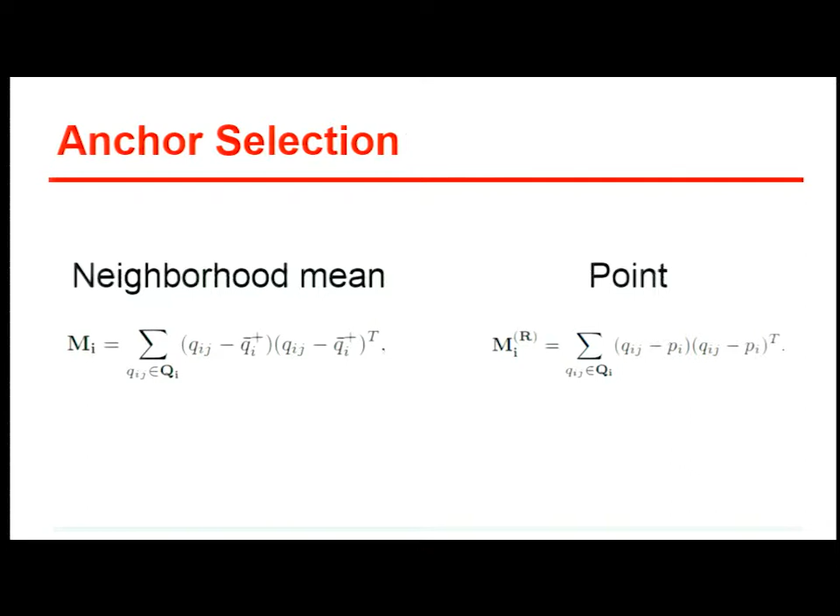Then the different modifications we had, we show them on the plane PCA method. Here we normalize all the vectors used in the computation versus not normalizing them. We have the anchor selector around the neighborhood mean versus the point itself. And we add Gaussian weights to decrease the influence of further away points.

From our computations, we have found that the use of the reference point is detrimental as the noise increases. We found that normalization is beneficial, and we found that using weights is detrimental when the neighborhood mean is used as an anchor, but it's improved when the reference point is used as an anchor.

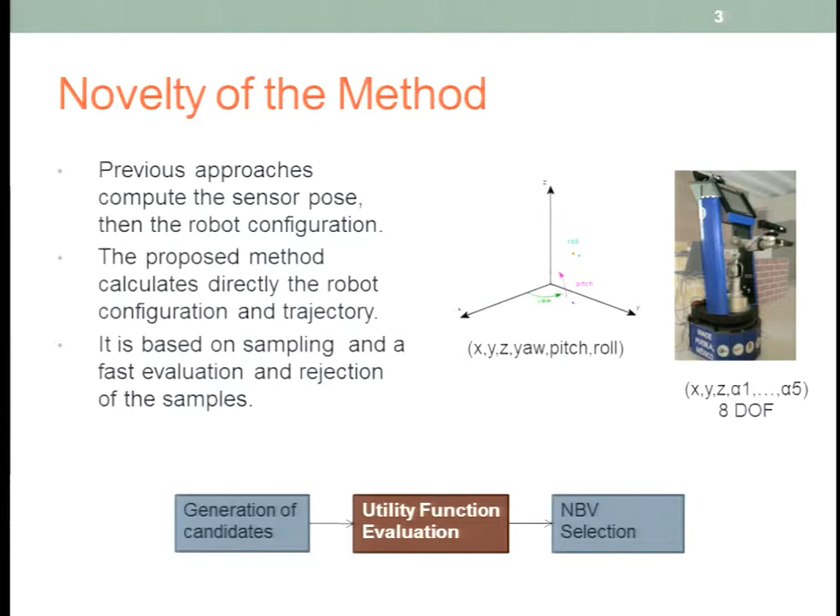The utility function that we propose evaluates several aspects of a desirable next best view. Given that to evaluate a large set of views could be very expensive, we propose an evaluation strategy where the utility function is implemented as a series of factors.

In conclusion, our experiment shows that it is possible to plan the next best view directly in the configuration space using direct kinematics. For an 8 degrees of freedom robot, the processing time is in the order of seconds when we use the evaluation strategy. So I hope to see you in the interactive session.

Hello, my name is Helder Araújo. I'm the second author, and I'll be talking about pose estimation in the case of a mobile robot moving on a plane. To estimate this pose, we consider as reference or landmarks 3D lines.

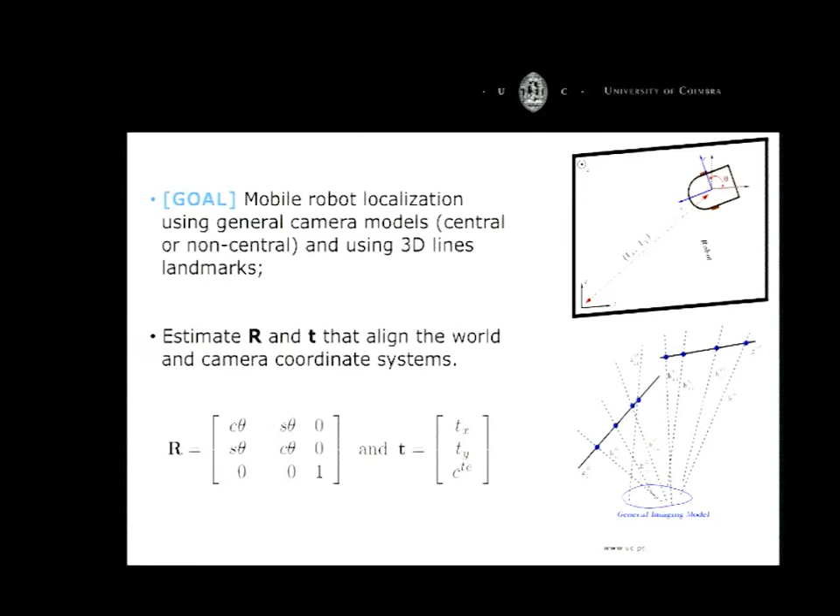What we have is the non-central camera, generalized camera calibrated, meaning that for each pixel we know the projecting line and we know the coordinates of 3D lines. These 3D lines are projected as lines or segmented lines onto the image, and from these projections we compute the rotation and this translation.

For that purpose, we use the condition that if we express two lines in Plucker coordinates, there is a condition that expresses their intersection, and from this polynomial equation, since both lines, meaning the projecting line and 3D line, must be expressed in the same coordinate system, we introduce the rigid transformation, and this rigid transformation allows us to compute the pose of the robot in the world relative to the camera system.

So this is expressed as an optimization problem subject to constraints, and these constraints basically restrict the kind of motion that the robot can perform, in this case planar motion. And by restraining or constraining the solution, we basically are able to achieve a robust estimate for pose, which is actually quite robust also against noise.

So we basically use 4 lines, and the minimum would be 3 lines. And in some cases, if you allow multiple solutions, even 2 lines. So with 4 lines, we're able to robustly estimate the motion of the robot, pose, and of course also the motion. And if you want to see some more details, please show up at the interaction session.

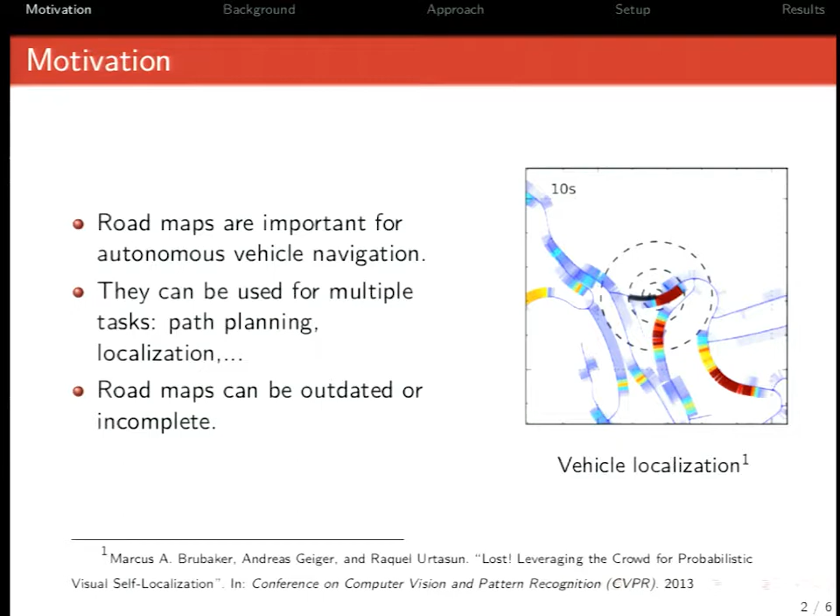First, your algorithm may never converge, and you never get localized, or you were localized and then get lost. So there exists several works on estimating road maps from multiple GPS traces, but most of them use a lot of GPS traces collected from commercially tracked vehicles. They also require a lot of time to compute the map in case of an update. So what we want to propose is to estimate a map from crowdsourced GPS traces gathered from low-cost devices. And this work has to be done from only a few GPS traces.

So in order to do that, we use a spline-based representation of the road. Then we use the control points of the spline in a state space representation and a Kalman filter to ensure an easy and fast update of the road map.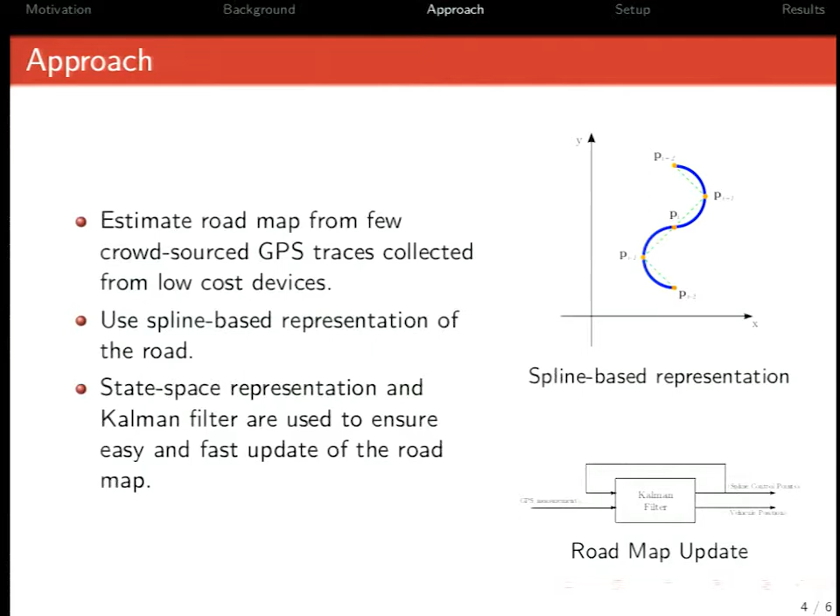In order to evaluate our approach, we collected different GPS traces from different drivers, vehicles, and times. We evaluated our approach against only one INS GPS data, and we compare our result with commercially freely available digital maps such as Google Maps and OpenStreetMap.

So our result shows two things. First, we achieve a fast computation in case of map update, or if you want to obtain a brand new map without prior knowledge of any governmental data. Our second result is, let's say, a good performance. On the right-hand side, we compare the map we obtain only from few GPS traces to Google Maps data and OpenStreetMap data. And as you can notice, in some part of our work, we are able to outperform this data.

So we ensure a good quality. Thank you very much for your time.

You can see here, our robot has 2 RFID antennas. These antennas are able to measure the signal strength. With this signal strength, the robot knows where the tag is. And with the position of the tag, the robot is able to follow the person and also keep some distance between the robot and the person.

You can see the environment here is our supermarket environment. In the supermarket, we have around 500 RFID tags. So if the signal strength is higher than a threshold, the robot will stop. And here is another example: the robot is following a person in a corridor environment.

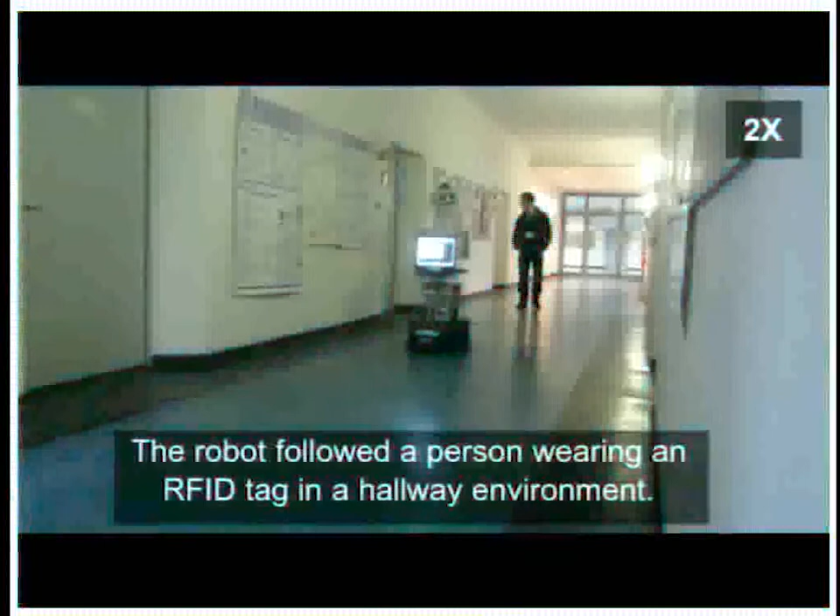Also, the robot is able to go into the elevator and get out of the elevator. So we are quite surprised by this because basically the elevator is made of metal, and the metal has a very high influence on the detection of RFID tags.

Now you can see another example. The robot is following a person in a very narrow corridor in a library environment. In our library, we have around 5,000 books with RFID tags. This environment is also very challenging because the performance of the RFID reader highly depends on the tag densities.

More precisely, the approach we use is based on a particle filter. To deal with motion uncertainty, we use a two-stage dynamic motion model to recover from tracking failures. Also, we use a dual particle filter to recover from tracking failures.

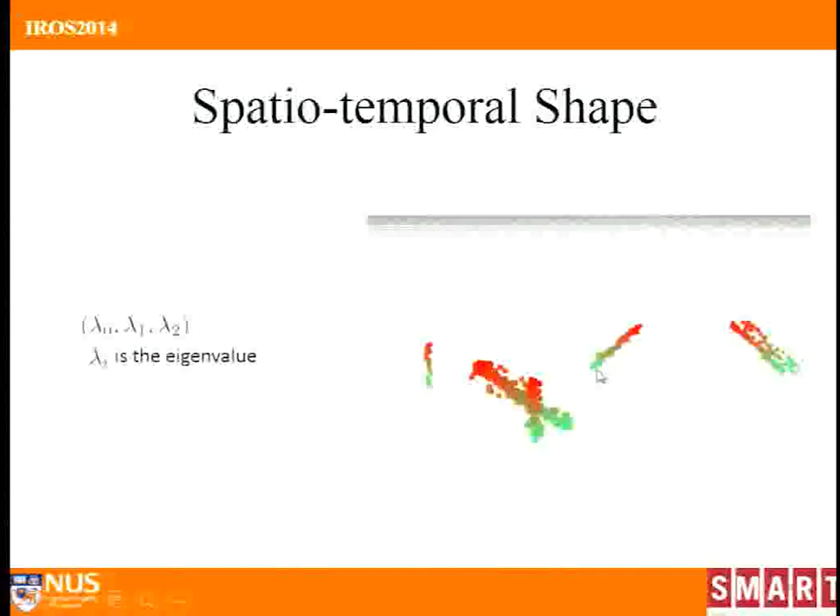So we extract the normal, expressed here with the components nx, ny, and t. From here, we get the velocity information. We also find the shape, the spatial temporal shape, using the eigenvalues. That's the second feature. The third feature is the noise, the number of neighbors around each scan point, the distance, and the orientation error.

Here are some results. We use SVM classification for a vehicle moving in the evening in our university town environment. You can see the moving objects, the pedestrians, being tracked in real time. We track it using Kalman filter tracking. The data is trained using SVM offline, but the actual implementation is done in real time after the SVM has been trained offline.

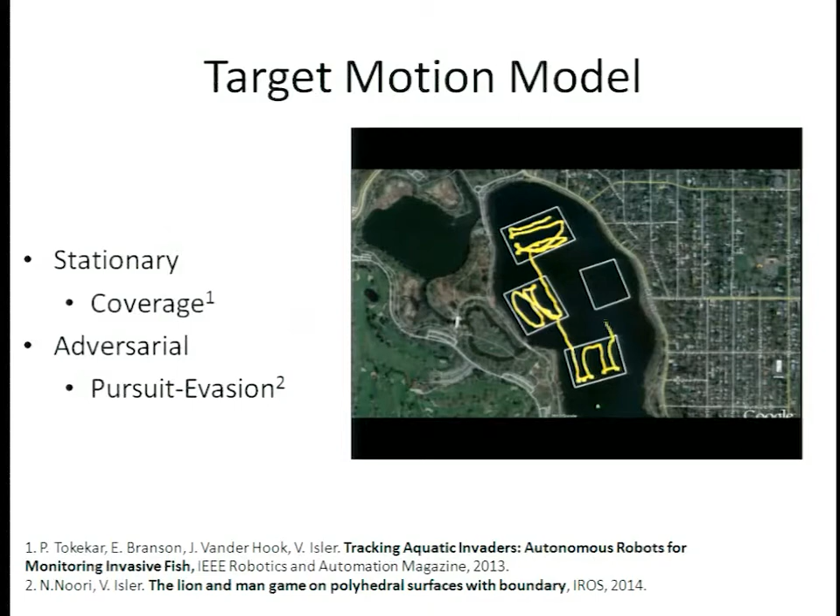But before designing search strategies, we must first decide on the model for the motion of the target. On one extreme, we can assume that the target is not moving and it's stationary. In this case, the search problem becomes a coverage problem. On the other hand, we can assume that the target is moving but adversarial, in which case the problem becomes a pursuit evasion problem, which I presented yesterday.

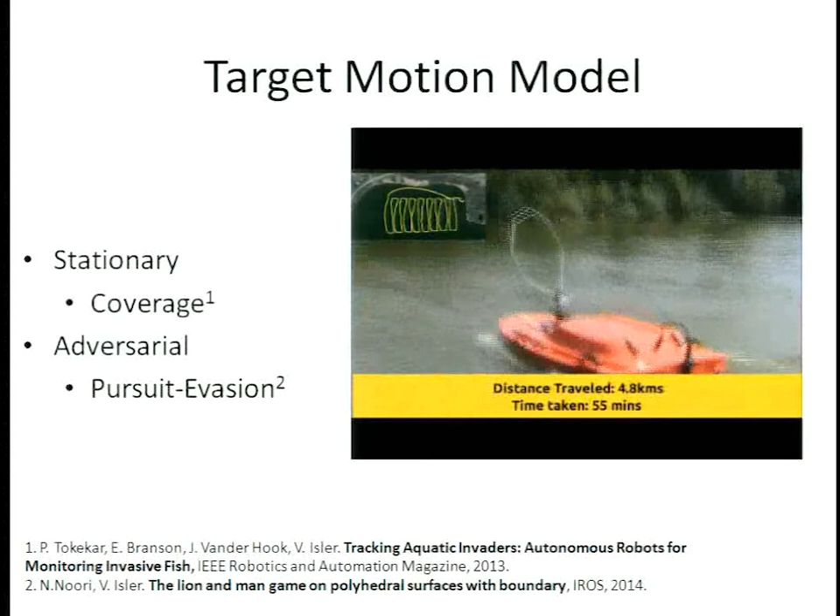In between these two extreme cases, we can model the target as a stochastic process. For example, we can assume that the target is doing a random walk. This is what we have studied starting from last year. We assume that the target is a one-dimensional random walk moving along a line, and in this paper, we study search strategies to find a random walk moving in a two-dimensional environment, like a square region.

One might think that coverage strategies would work here because the target is randomly moving in the environment, but this is not true, because the searcher is also moving, and so it can exploit its own motion to update its belief about the location of the target. In this work, we provide insights about different search strategies that give better results, and I'd be happy to present these strategies in my interactive session. Thank you.

Hey, good afternoon. So this talk is going to be centered around a gripper inspired by gecko feet. Geckos have nano and microscopic structures on their feet that allow them to adhere to a variety of surfaces, and we've replicated this in a polymer.

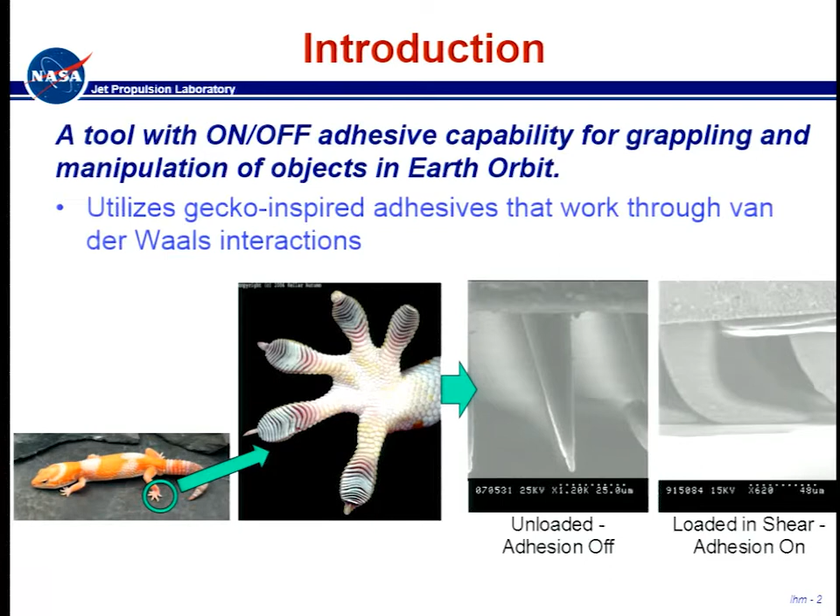So what's the problem we're trying to solve? Basically, the better your gripper is, the less demanding the control system managing it needs to be. If you do not rapidly attach to a surface in space, you or the object will tip off due to the reaction forces. In the same vein, you want to know you've got a good grip on an object before you exert any forces yourself. The last thing you want is your $1 million inspection robot floating off the space station.

So we've crafted a device that can rapidly actuate and also gauge the quality of the grip. Really what we're after is knowing if the pad's engaged or not—am I adhered? There's some required preloading that's necessary, so you also want to know the amount of normal force, and when do I need to actuate—how far away is the object? Really, we were after this, but because of the design of the device, we found out we could extract that data as well.

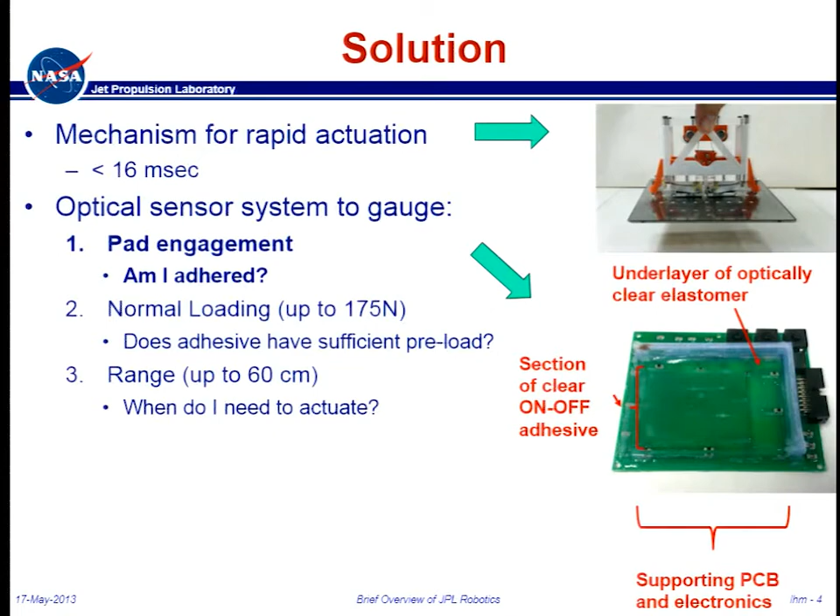So here's a quick video that shows the rapid actuation. We'll go through normal speed, slow it down, higher frame rate, and then regular speed. We speculate the stalks themselves can actuate much, much faster than this, but due to camera limitations, we could only tell it's about 16 milliseconds.